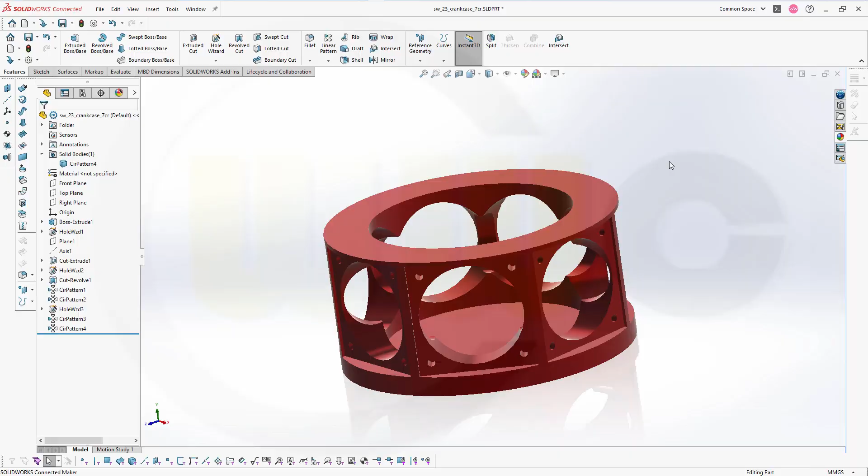I want to do that crankcase for my Redux 7-cylinder radial engine. Let's take a look at the drawing. So here it is, and you could make a screenshot and then follow this exercise step by step if you want. So let's have fun with SolidWorks.

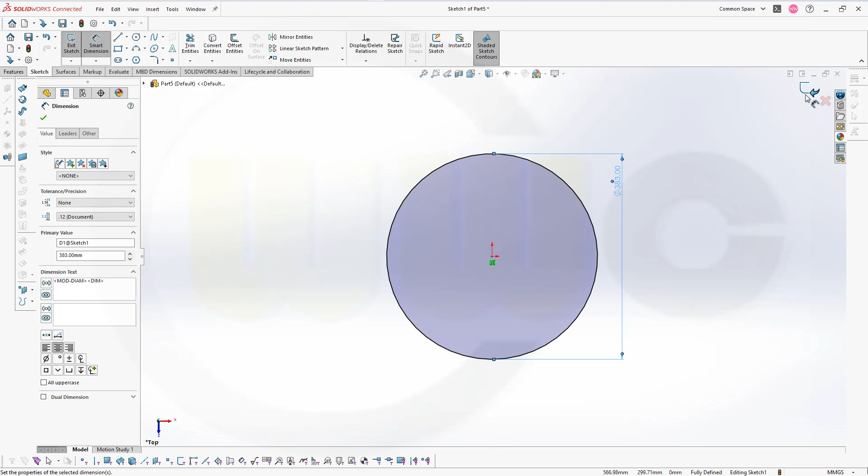Okay, let's start with a sketch on the top plane. That will be a circle, and the diameter of this circle should be 383. Finish that sketch, make an extrude, make it 186, and confirm.

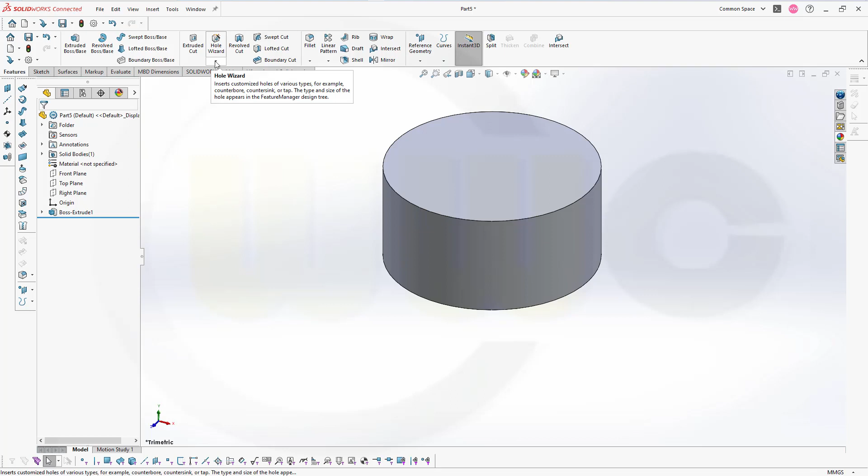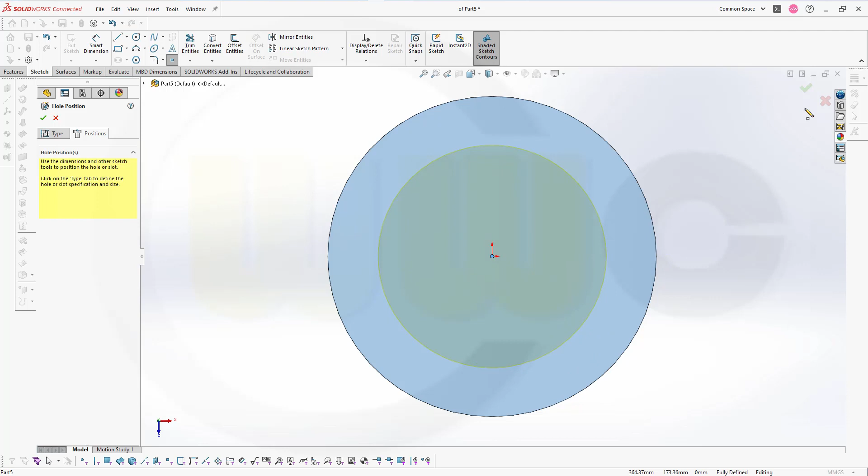Then I will need a point right there, because I want to use the hole wizard. So let's go for the hole wizard and see if we can snap onto that center point. Hole wizard. It's a legacy hole, yes. It's blind, yes. So this should be 266 and the depth should be 166. So let's go for positions, select the surface and put it right there, and leave that sketch, and we got that hole.

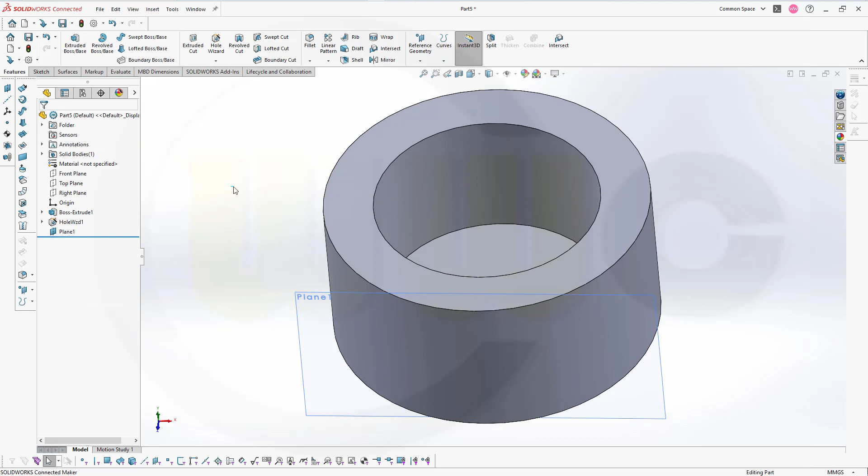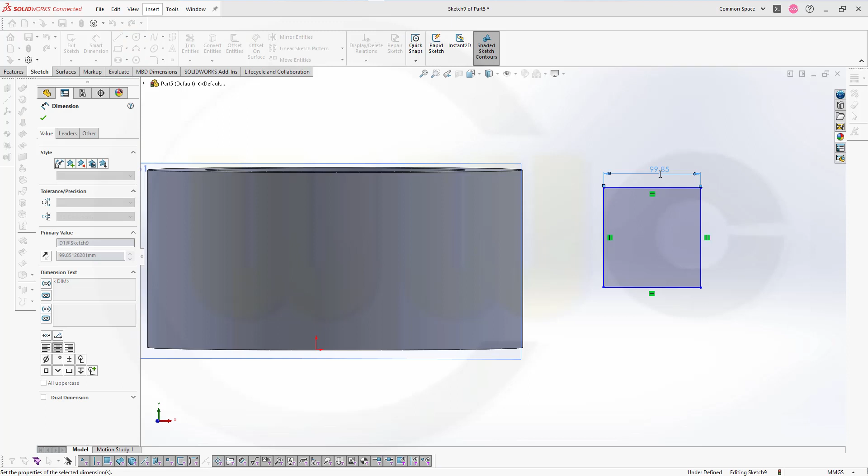Now I need an offset plane, and it should be an offset from the front plane, and the distance should be 171. Confirm. Then I need a sketch on this plane here, and I need a square, and it should be 155 by 155. No, not 55, 54. 154 and 154.

Then I will need a circle. What kind of circle do we have? We have a circle and the perimeter one. So let's just go for a circle. Put it right there. Make it for construction only. And put 3 of those corners onto that circle. Like that. Then I need another circle. It should be for construction, and the diameter should be 170.

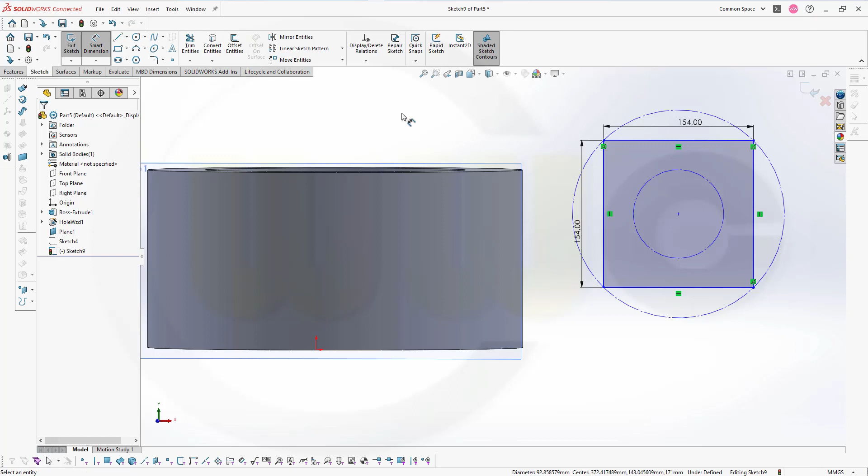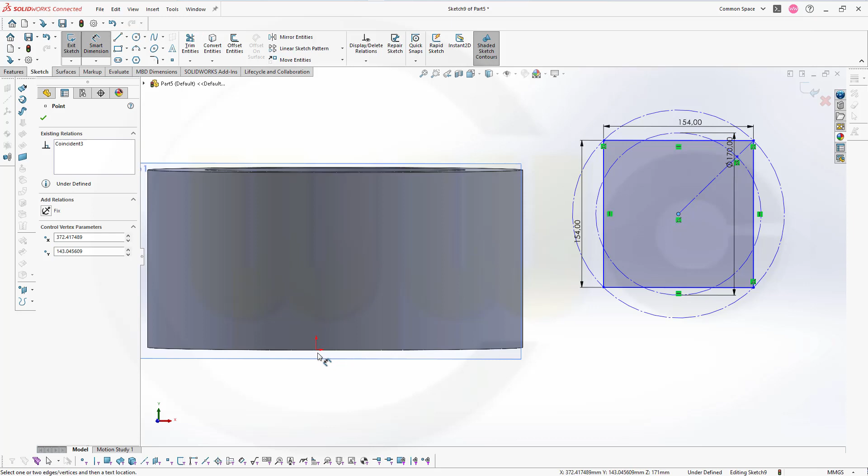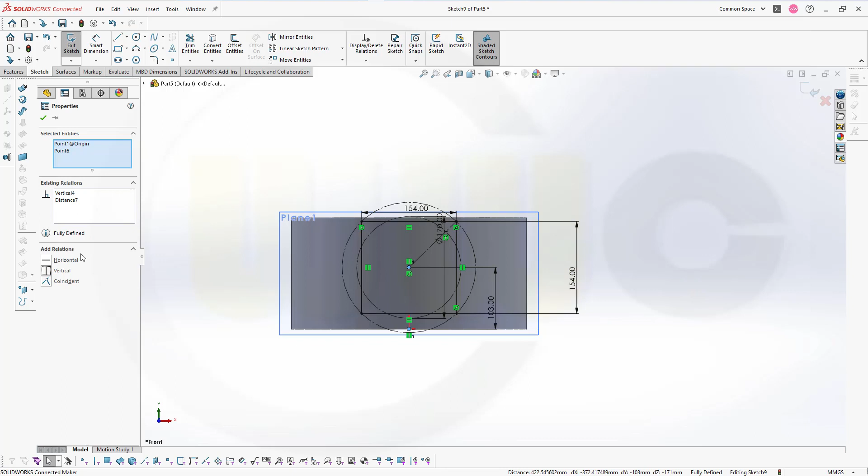Then I need a construction line from this point to that corner here. Make it for construction. Maybe put a point here and on the intersection. Then I need a dimension from this point to the origin, if possible. Let's look straightforward. So like this, 103 millimeter. And this point and that point here should be aligned vertically. Finish that sketch.

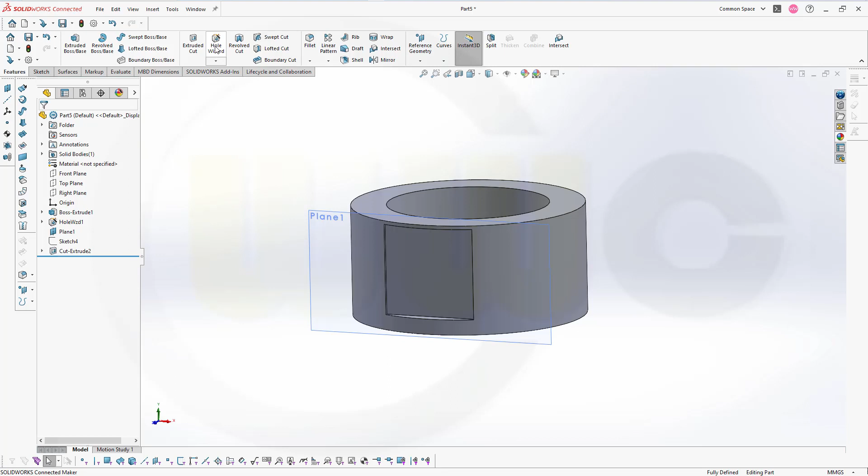Let's make an extrude or a cut. It's a cut. Change direction and make it maybe 100. That's okay. And confirm. Then I need a hole, and this should be not on the plane. I could put it on the plane, but I want it to be on that surface, and it might be a good idea to show that sketch.

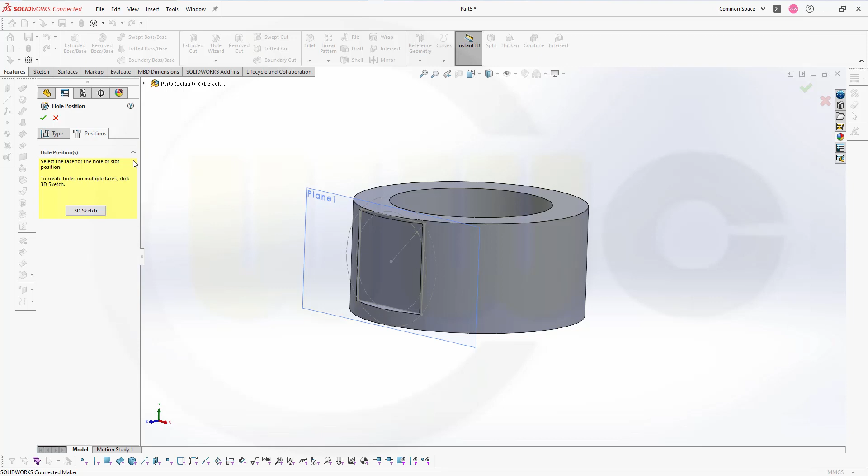Now again go for the hole wizard. It should be a simple blind one, so that should be 136, and the depth might be 100 or up to next. So let's go for 100 and go for the positions. Should be on the surface right there on this point, and finish that sketch.

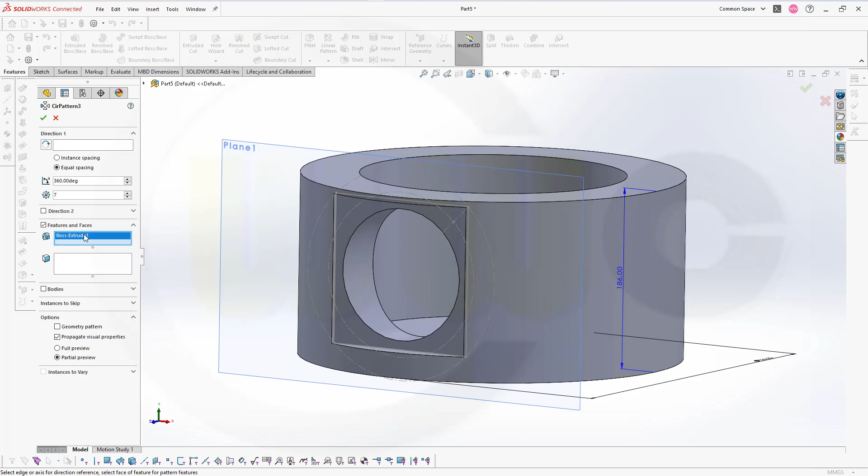And okay, so let's make a circular pattern. I usually pattern every feature one by one, so everyone on its own. You could pattern them all together, but let's go for a circular pattern, and it should be a feature pattern, and I want to use that surface here and the implied axis as rotation axis, not this here, but there you go. I need 7 instances, 360 degrees, equal spacing, that's okay. And I want to pattern that cut here and confirm. Let's hide that plane.

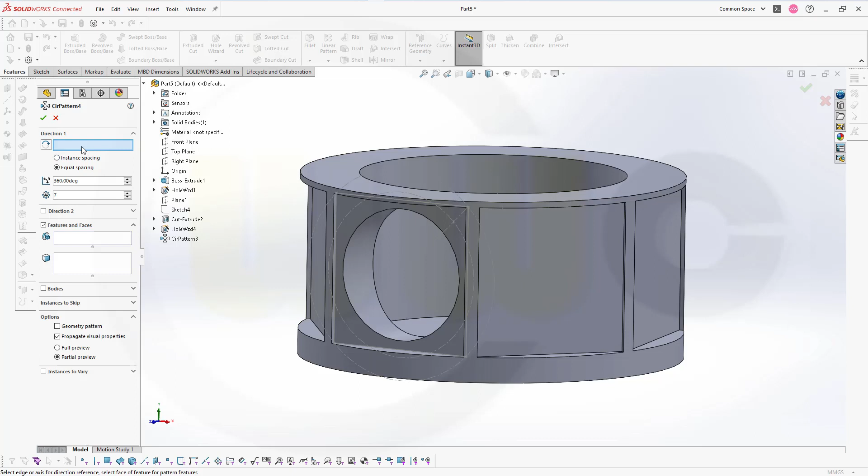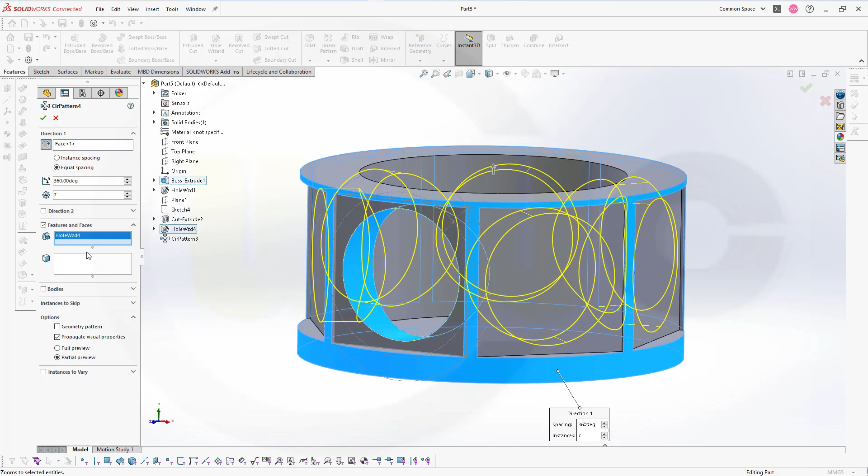And now I want to pattern that hole here. So let's take a look. Go for another circular pattern. The direction would be this surface and the implied axis. That looks okay. Equal spacing, yes, 360 degrees, 7 instances, and I want to pattern that hole here. Let's confirm and see. Yeah, that looks okay.

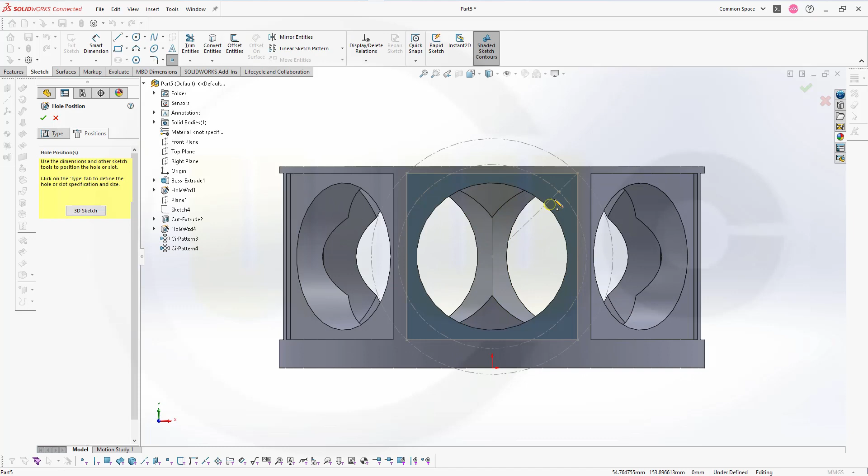Now another hole on this point here. It should be 10 millimeter by 20, so this will be 20, and this will be 10. Go to positions, click on that surface right here, confirm this, and now make another circular pattern. Feature would be that hole wizard, yes, that's okay. The axis of rotation should be defined by that hole here, and I need 4 instances, and confirm.

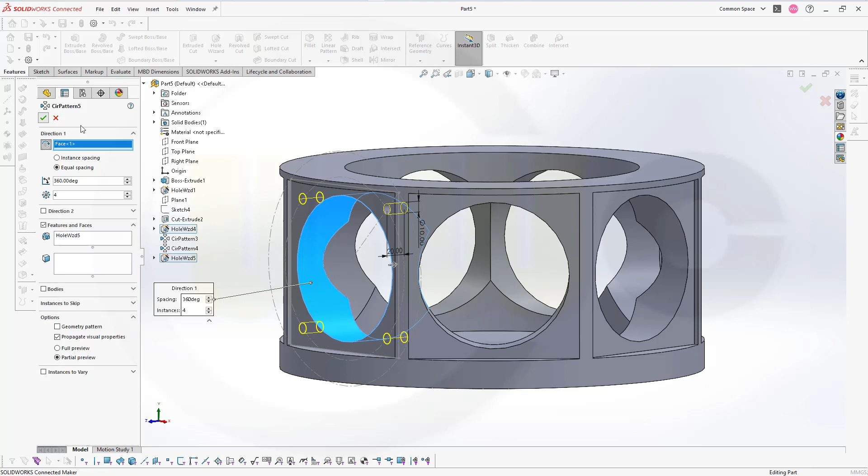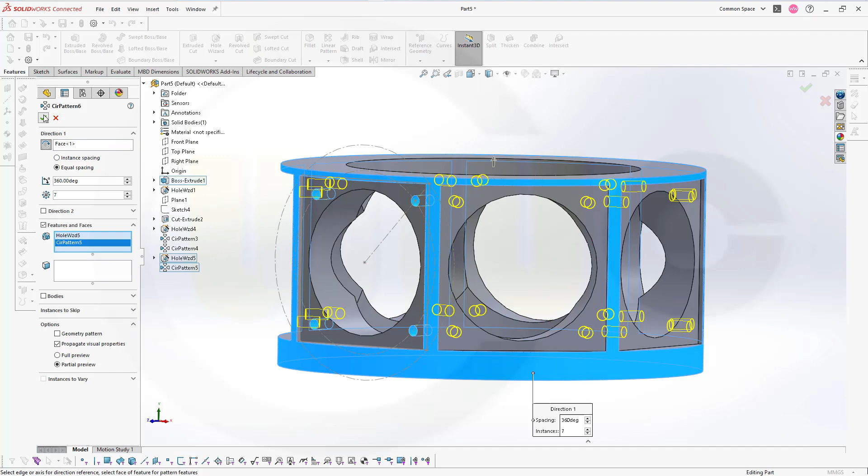Now let's pattern that pattern. That would be that hole and that pattern. Those two should be patterned, so go for a circular pattern. It's another feature pattern. Again, I want 7 instances. And the axis would be on this surface here, and that implied axis. And the features, that would be the hole wizard and that circular pattern here. And confirm. Looks good. Maybe hide that sketch.

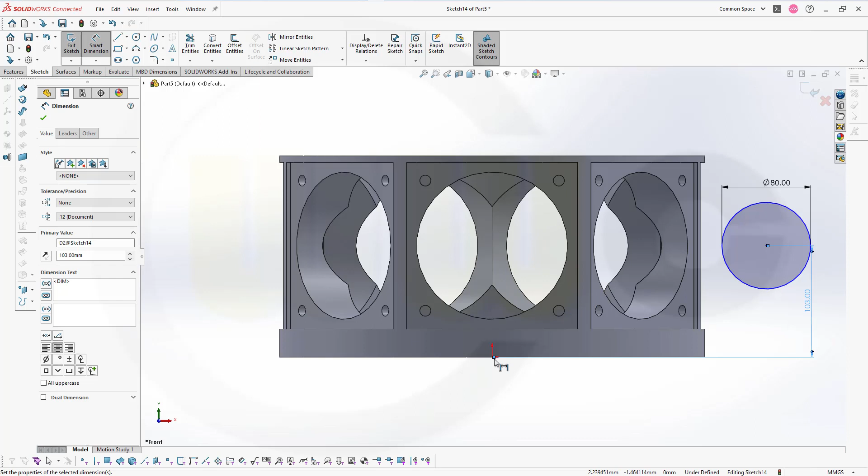Now let's go for the last revolve cut, and therefore I need a sketch on the front plane. This will be a circle. Diameter should be 80. Distance from this point to that point should be 103. And the distance again from this point to that point horizontally should be 140.

Finish that sketch, and let's make another revolve cut, not another one, a first one, revolve cut with that sketch, yes, and the axis of rotation would be again the implied. I need an axis, so I could go for that edge, or maybe, just maybe, I can use that sketch here. That would be okay, if it's accepted. No, it's not accepted, not really. And the edge as well, so obviously I need an axis. So let's go for an axis, and then I could use the axis from the beginning on.

So let's go for two planes. That would be the right plane and the front plane, and confirm. So I could move this up, maybe before that, even here, and I could also move that plane up here, one more, like that, and then I could use that axis and that sketch to make the revolve. So go for the cut, not extruded cut, but revolved cut. I need that sketch here, and the axis would be this one. That's okay, and confirm.

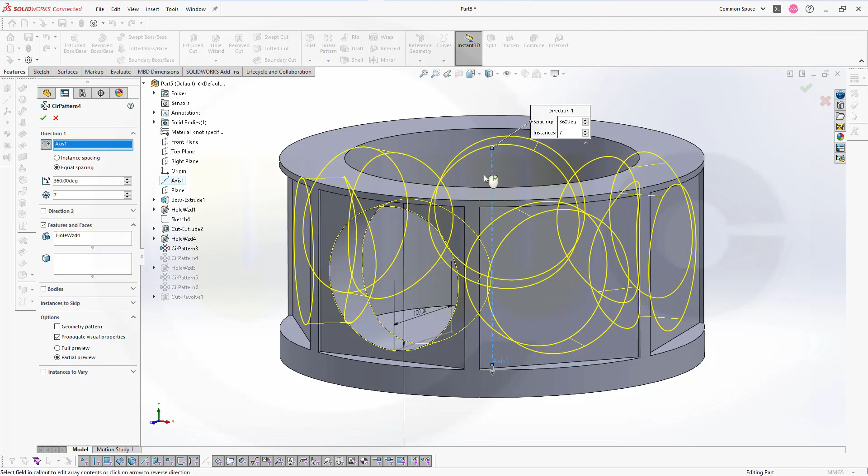And now give that circular pattern this axis here, that one, confirm. And then for this one, again use that axis, confirm. And for this one here, again use that axis and confirm.

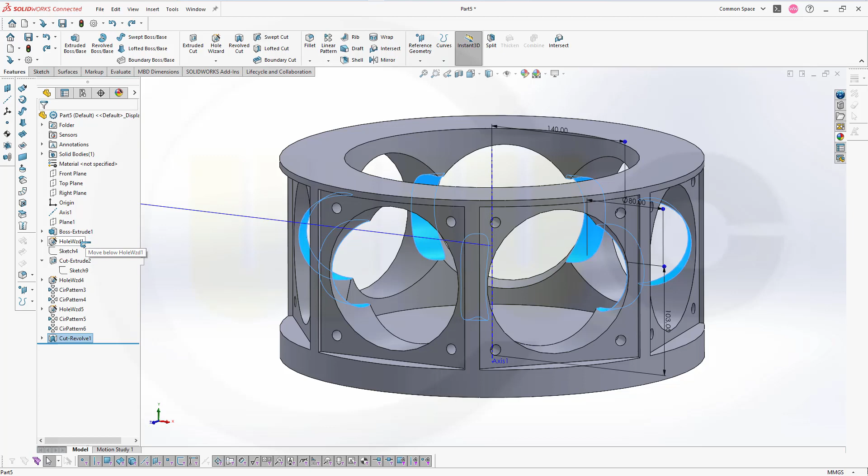And at last I want to reorder that cut revolve before that hole wizard, or before that cut extrude at least, up there, or yeah, let's move it up there, and I'm done. So I hope it was helpful, hope you liked it.